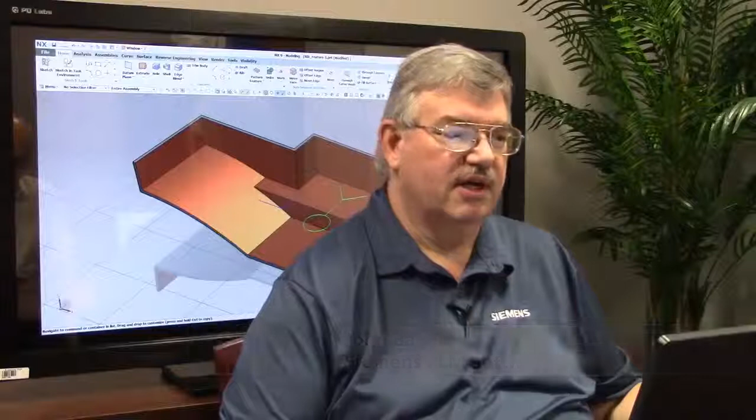Welcome. I'm John Baker, and I'm going to be talking today about some new functionality that we've added to NX9. Today we're going to talk about the rib function.

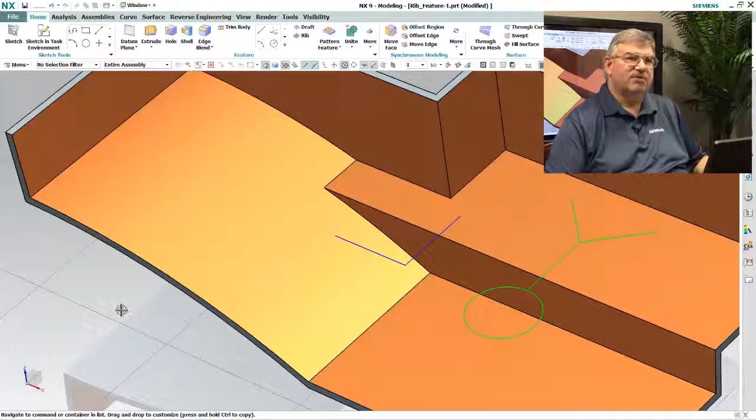Now, here's an example, a simple part, and I want to add a rib basically using this profile here. Now, in the past, we could add ribs using things like an extrude function, but it takes extra steps, and you had to kind of know a proper procedure and so on. So what we've decided is that since ribs are very common, why don't we just make a function specifically for ribs. So we have the rib function, and I'm just going to pick this profile.

And you notice I didn't have to have a complete profile because it's smart enough to understand that if I want to create a rib, it's obviously going to be extended out to the edges of the part and so on. And I can add drafts, so I come down here because if this was a molded part, it was going to have drafts. So it automatically adds draft. It knows that the draft is symmetrical. It knows that it starts at the top rung here.

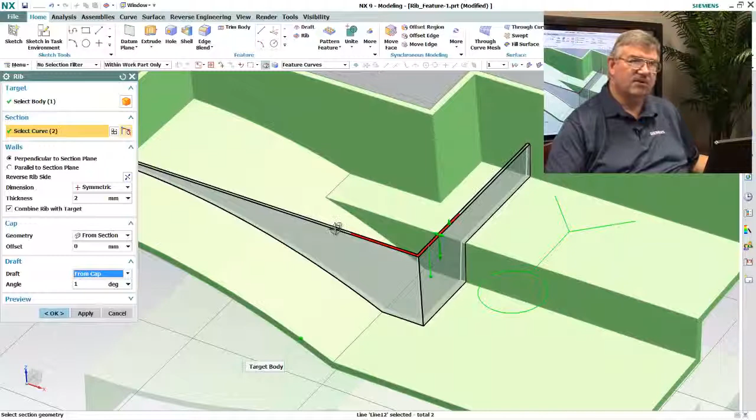And now I can make the rib shorter, shallower or deeper, higher. And you notice I get to the top here, it's not going to go any farther than that because, of course, if it went past the top, it wouldn't be a rib anymore. It'd be something else. So this is an easy way to create that rib. So there we have it.

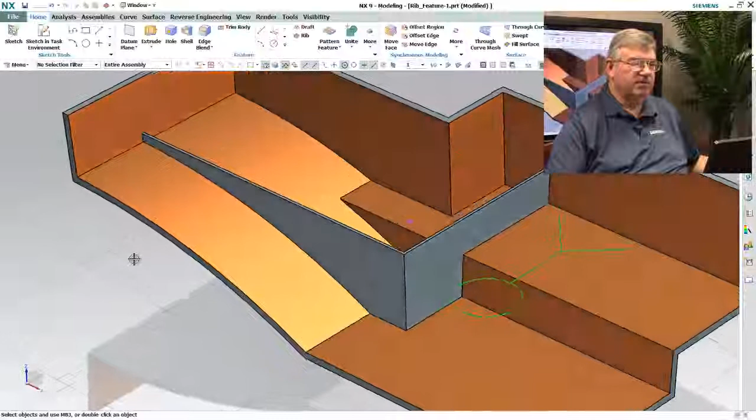Now, as I said, I could have created that rib with an extrude, but this profile here actually isn't suitable for an extrude because it's going to treat this circular area here as a region, and it's going to try to fill that in. That's what an extrude function would do. So in this case, the rib function is very handy because it knows exactly how to create that.

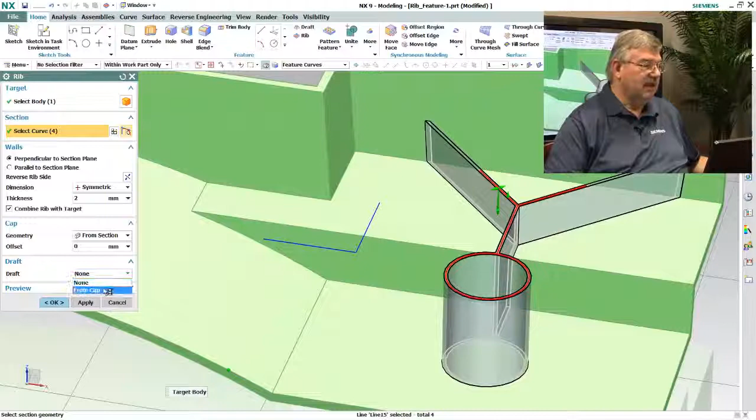Again, I can add the draft to it because it's going to be a molded part. And so there we have the part. You can see the draft on it. And we'll go ahead and accept it, and now I have my rib.

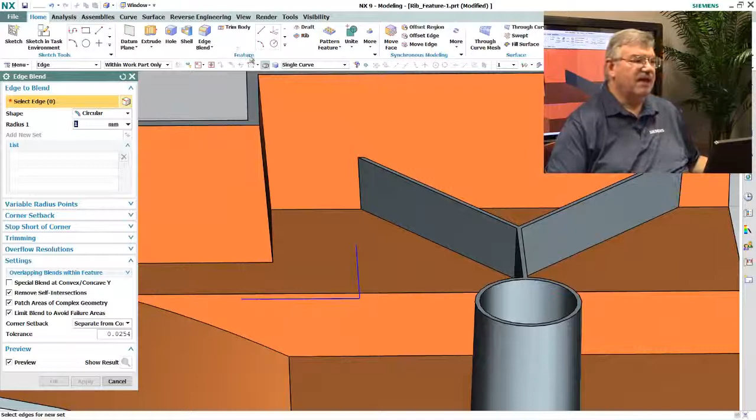Now, you get a rib like this, you probably want to put blends around the top here to clean it up, to make it nice and smooth. So I'll go into the blend function. Now, this is the same regular blend function we've always had, and I could come in and say, well, gee, I could pick all these edges, but it'd be easier if I could just pick the face. So we've always had this face edges command.

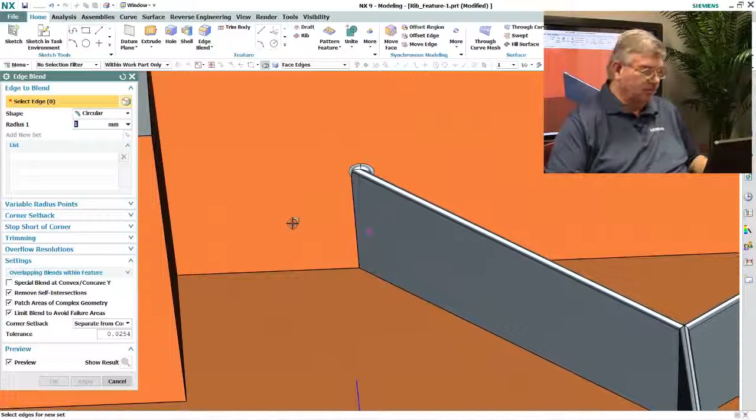So I come in here and I pick the face, and I say, okay, there's my face, and I go ahead and accept that. Well, I've got the blends, but that isn't really what you want because see this corner here? That isn't really the way you would want to end that blend. So rather than creating a totally new blend function, what we've done is we've added a new way of selecting what I want to blend.

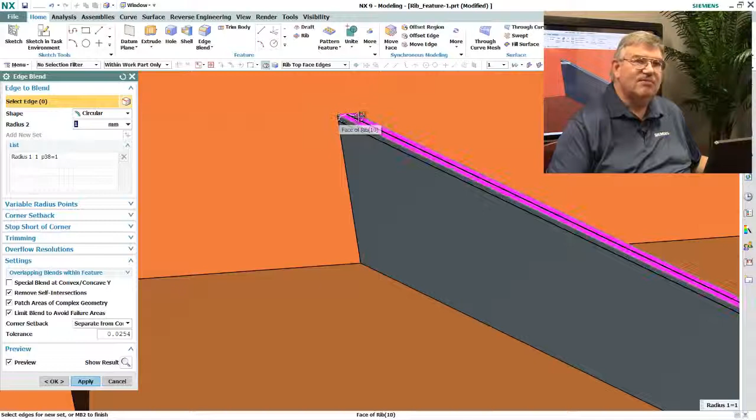And so we're going to say rib top edges. So it knows what a rib is supposed to look like. So now when I pick this, even though I've picked the top face again, it knows to ignore these last faces across the edge. It's only taking the edge of the rib and not the end of the rib, and therefore I get a blend exactly the way I want it to be.

And as you can see, it handles the Y corner here, it handles the transition, and so now I get the fully blended rib exactly the way I would like it to be.